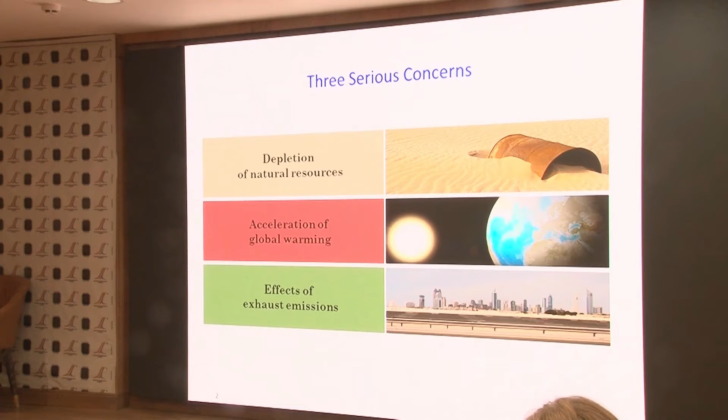So I think I'll skip some of the initial things, but one of the things that I was just having discussion with our colleagues, I would just like to draw your attention to certain things and certain facts.

One is that if you look at who is consuming most oil, the United States consumes about 26% of the oil with 300 million people. India is 2.6% of the global oil, with four times the population, which means that per capita energy consumption is 1/40th. That is one factor that we have to keep in mind.

Since 1850 Industrial Revolution, we have had almost 16, 17, 18% of the global population, but our contribution to the net GHG emissions so far has been less than 4%. That's another fact that we have to keep in mind.

So the West, Europe and America, they have used hydrocarbon sources for achieving the level of development. India has not. So we were talking about coal phasing down. I think we still are a long way from parity in per capita CO2 emissions, per capita energy consumption.

And we all know that energy consumption is related to development, human development index in some sense. We can't deny the progress, we can't deny the right of mobility to our people. The whole earth belongs to all of us. So that's one political point that I wanted to make here.

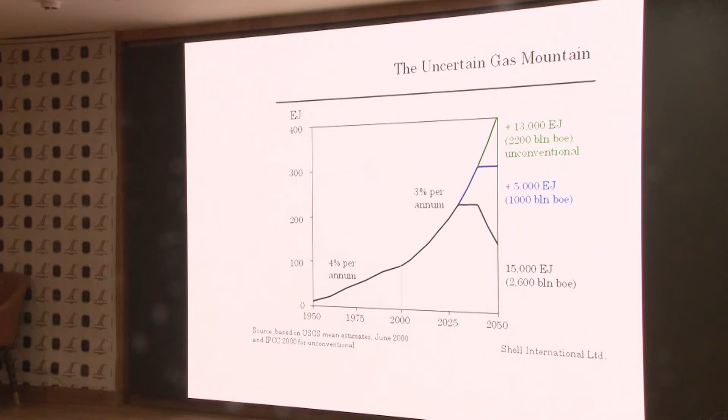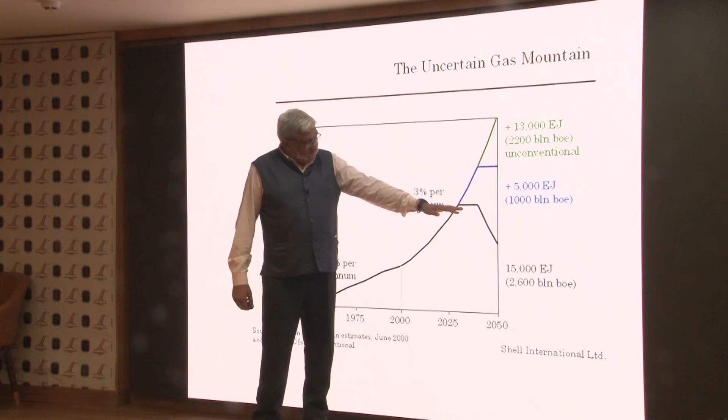If you look at the energy consumption, this is a story for 100 years. The story is that your energy consumption grew by about 4%, then it grew by about 3%, and now we are somewhere here, where our petroleum resources are going to be plateauing. And then after some plateauing of 5-10 years, they will start coming down. But our demand will keep rising.

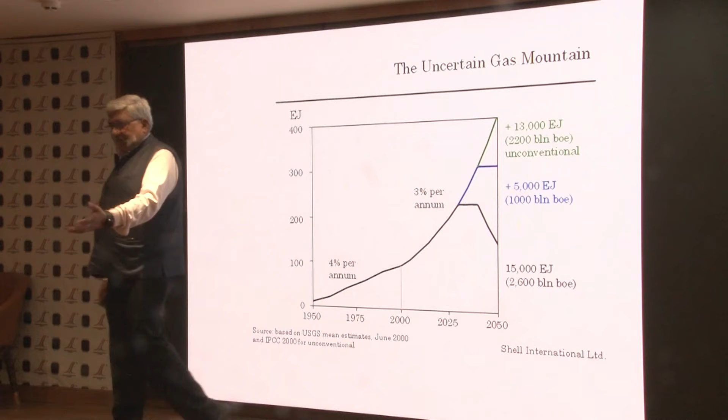So how do we meet that demand? The demand will be first met by gas. So all countries have started adopting to natural gas, hydrogen, and so on. But natural gas also has finite sources, so it will also plateau out. And then we will have to go for ammonia, hydrogen, e-fuels.

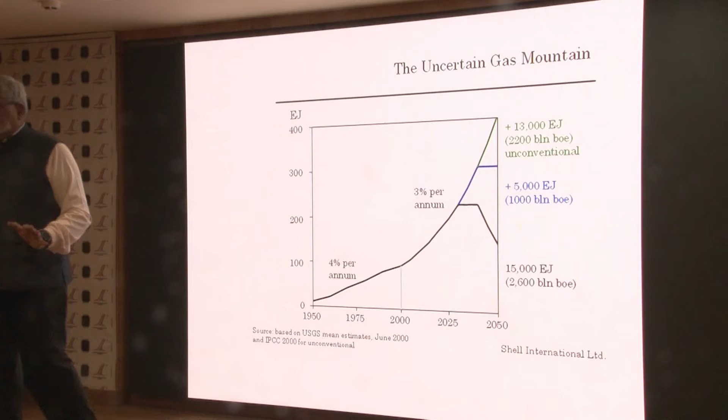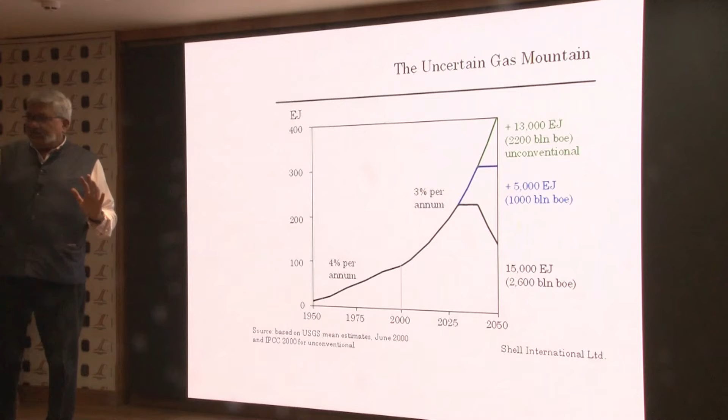So practically, this is about 2035, 2040, that leaves us with 15 years as scientists to develop solutions which are economically feasible. And we should be able to provide fuels at an economic price to compete with fossil fuels. Until then, fossil fuels, you like it or not, they are going to be there. You can't do away with them.

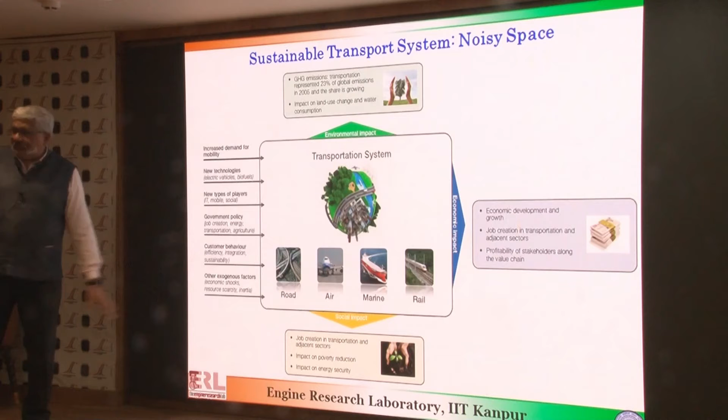The sustainable transport is a very noisy space. There are a lot of players. For example, it directly affects the economy, it directly affects employment, it has social impact, it has environmental impact, it has economic impact. I don't want to go into details, but this is very important that we go for sustainable transport. That's an objective towards which every country in the world should work.

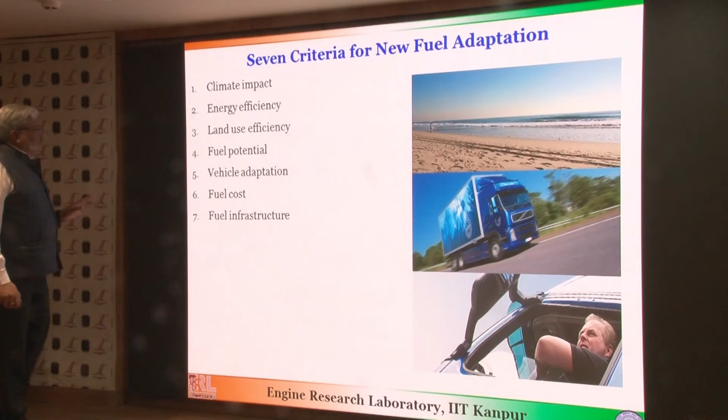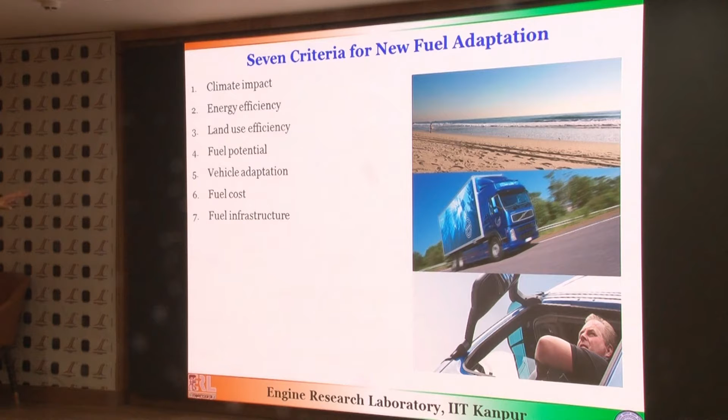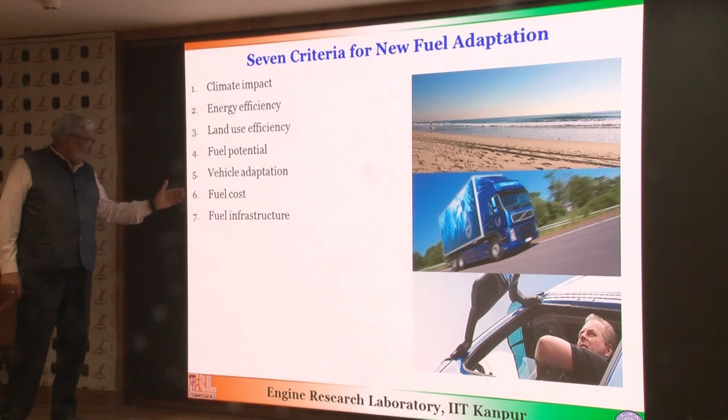This is one slide that I have taken from Volvo, and they provide a lot of transport solutions, and they propose that whenever we go for a new fuel, we have to look at these 7 factors: the impact on the climate, energy efficiency of the new fuel, land use efficiency, fuel's potential - how much you can produce, vehicle adaptation - how much hardware and software changes required, cost of the fuel and fuel infrastructure. So any new fuel you propose, you have to evaluate them.

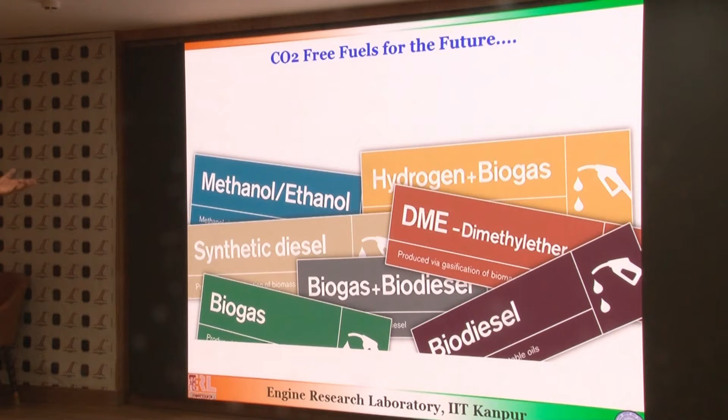And then, if you look at the sustainable fuel space, it's an extremely busy space with a lot of options coming: methanol, ethanol, hydrogen, synthetic diesel, biogas, biodiesel, and so on. And all of us agree on this, that at least in future, the fuels would still predominantly continue to be liquid fuels. They will still be made in refineries. E-fuels also have to come in some way into the refineries, use the refinery infrastructure.

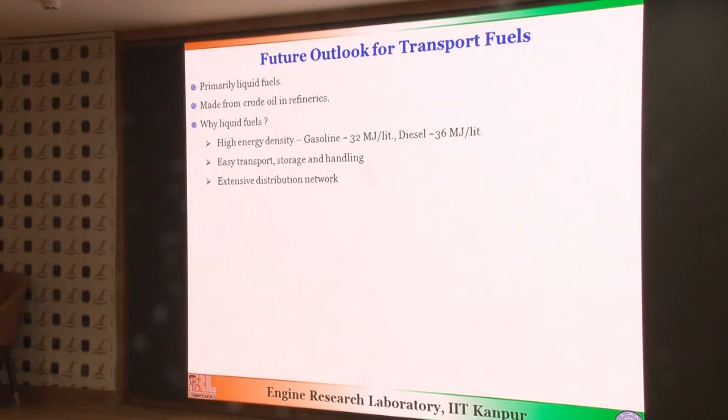Why will they be liquid fuels? Because there's nothing which packs more energy density compared to liquid fuels. They are very easy to store and handle, and there is extensive distribution network. We can't have a separate distribution network for any new fuel we propose.

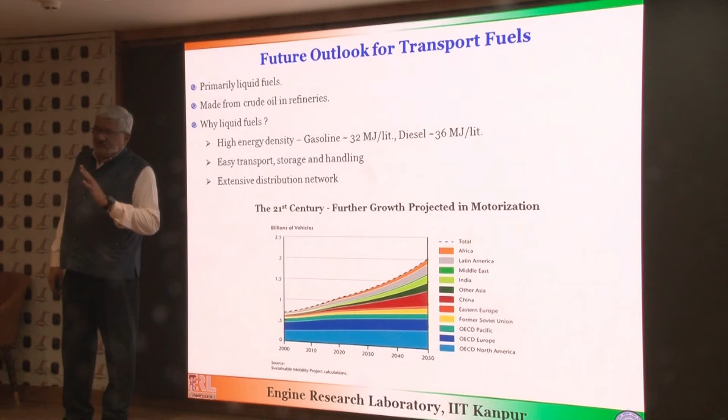India has 27 to my last count, Sakti will correct me, 27 per 1,000 people right now. So we have very little motorization, and we are just beginning to motorize and give personalized transport. So look where the action is. The action is in this triangle.

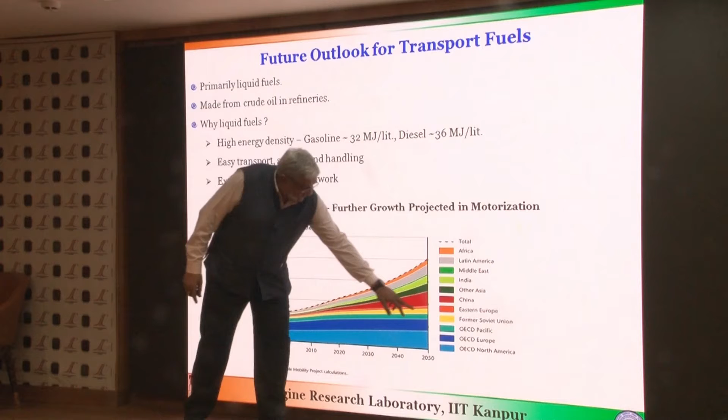And this triangle actually is China, Asia and India. So this is where the global growth is going to be in the next 20-30 years. And actually that is why Asia, or India and China, are big saviors. They are, in these times of economic depression, the engines of growth for the global economy. And this is where most of the action will happen, and we have to do it in a responsible way.

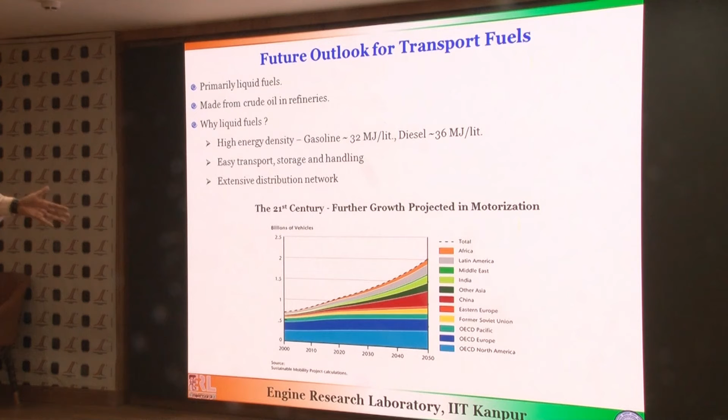So if you evaluate, excuse me.

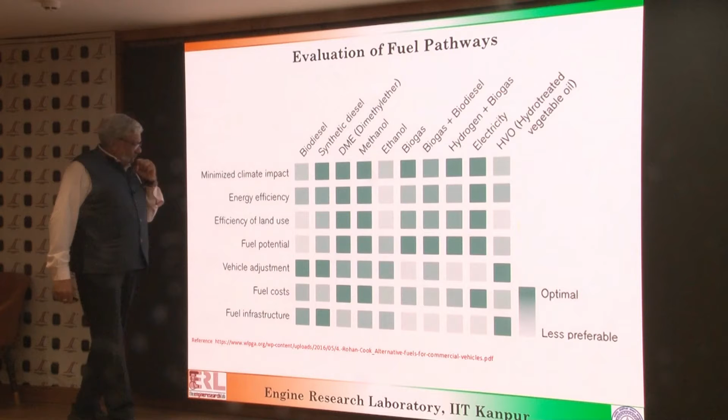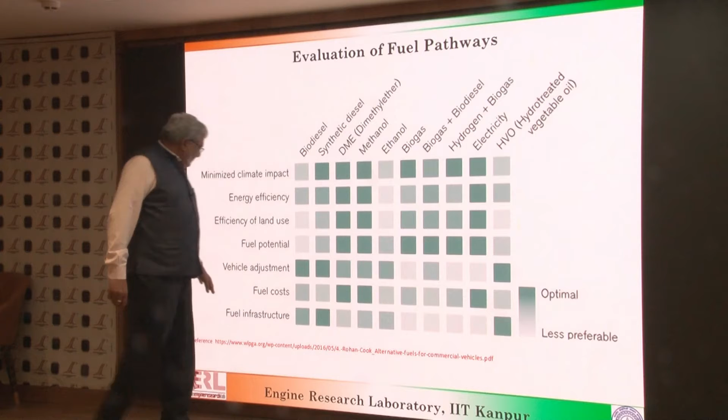So if you evaluate these fuels on the 7 factors which I just discussed, the darker one is optimal, the white one is less optimal. You can see here that in this entire sustainable fuel space, what stands out is DME, you can see these dark green patches here. Then methanol also stands out. EVs also stand out, but 2 patches are completely white, which is basically the fuel infrastructure and vehicle adjustment. It is a negative there. So from this table, you can actually figure out the future of each fuel, how it is going to be.

So in India right now, we are actually focusing on 4 important things. One is the ethanol economy. Our economy already has 12% penetration of ethanol, and we aim to bring it to 20% by 2025.

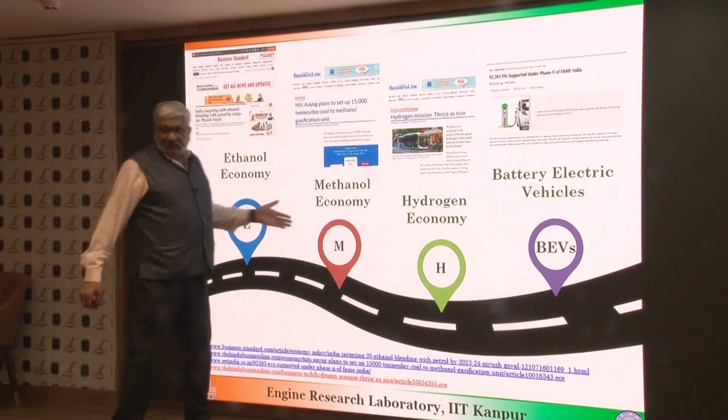We are pushing for methanol economy because we have a lot of coal reserves, and mostly 80% of our coal is high ash coal, which we can't burn in power plants or in the steel industry. So we are pushing for methanol economy by gasification, producing coal to syngas and syngas to methanol. And in this whole process, you don't put any CO2 into the atmosphere. So this is one good way.

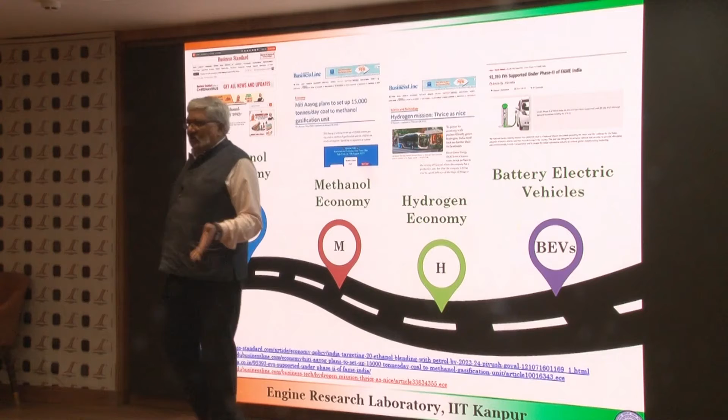And of course, government has already committed to spend about $3 billion in the hydrogen economy. We plan to have a $1 per kg hydrogen production target in 10 years. And then we are also pushing battery electric vehicles in a big way. So these are the 4-pronged approach which Government of India has taken to tackle and actually comply with our net zero, moving in that direction.

You know, this is just the beginning. So I'll talk about methanol. Methanol has 3 P factors that are very important.

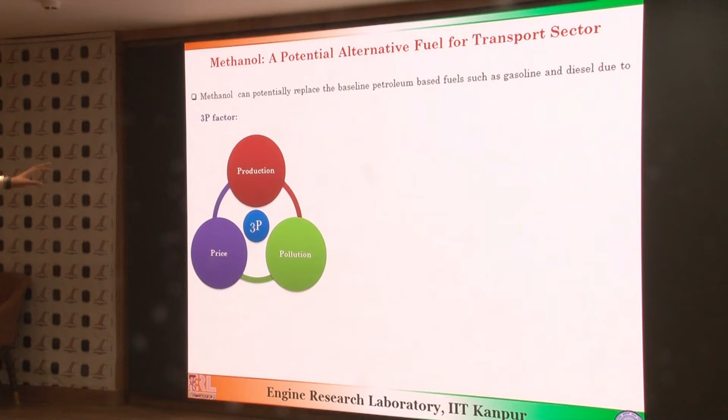One is production. Production cost of methanol in India is very, very low. When I say per unit energy, production cost per megajoule is roughly about 25% to 30% compared to fossil fuels. So it has a lot of economic advantage. The refinery guys don't like it, but that's price, production and pollution. Pollution is also very low in methanol. So these are all plus points.

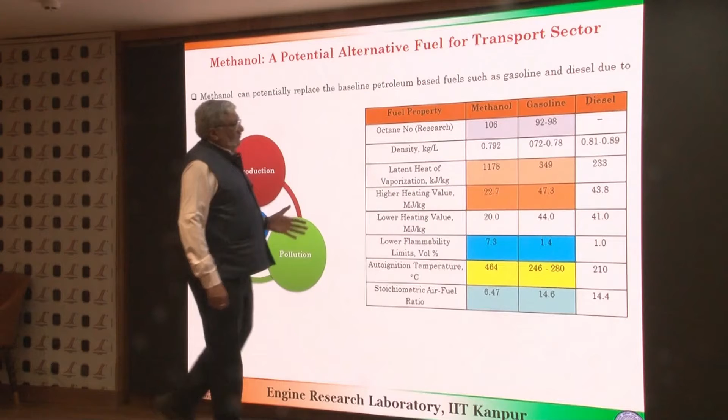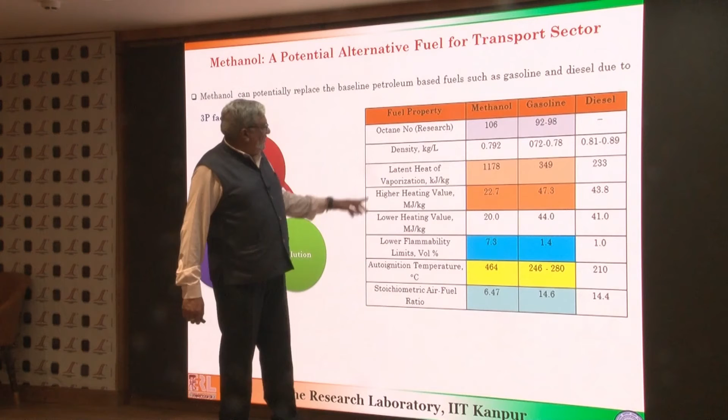Now, when we want to adopt it in the engine, we have to look at the properties very carefully. One thing that stands out is methanol has a very low calorific value, approximately half, and then a higher latent heat of vaporization. So accordingly, you have to tune your induction strategies and so on.

And then also, I'd just like to share a Chinese plan. Chinese are big on methanol. What they are trying to do is, they call it liquid sunshine, and they say methanol and DME are both e-fuels. Actually, methanol and DME are two sides of the same coin. You take 2 methanol, dehydrate them, remove water, and you are left with DME.

Methanol is a good fuel for SI engines, DME is a good fuel for CI engines. Now, what the Chinese are doing is purely economic. The government is not supporting it there. Here in India, government is supporting this. In China, there's no government support. It's purely economic reason, and they have more than 2 million vehicles running on methanol.

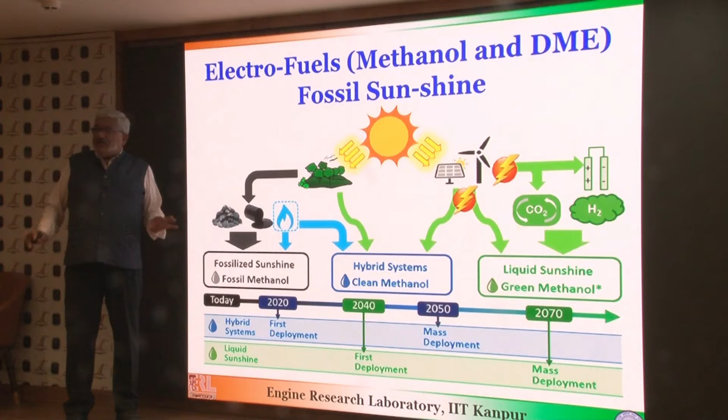So what they do is they also have a lot of high ash coal. They convert that and run all the taxis and vehicles which run long distance every day, purely because it costs less.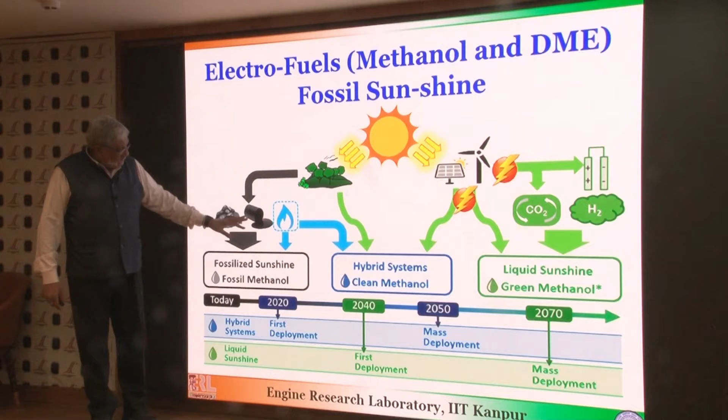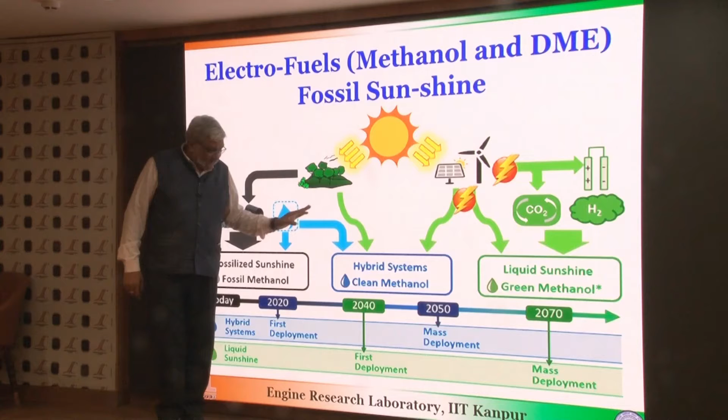And so what they plan to do is implement this at scale. They have already deployed this technology in a large scale in their economy. They want to make it clean. In order to make it clean, they will shift from coal to gas, and then eventually they will shift to biomass. Once you are on biomass, obviously the fossil CO2 will not be put into the atmosphere and it becomes cleaner. So by 2040 they want the first deployment, and mass deployment of this biomass to methanol conversion by 2050.

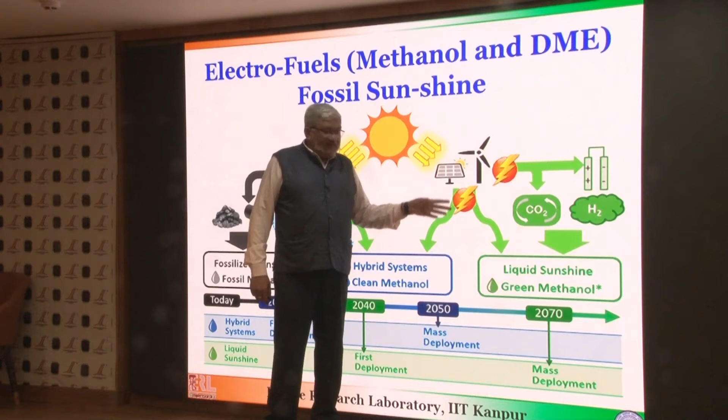And then by 2050, what they also want to do is create electricity from CO2-free sources, solar and wind, use that electricity to split water, generate hydrogen, capture the hydrogen, capture the carbon dioxide from the atmosphere, react it with hydrogen, and produce methanol. So this methanol, the first technology demonstration commercial plant, they have targeted 2040, and then large scale will be 2070. That's their plan.

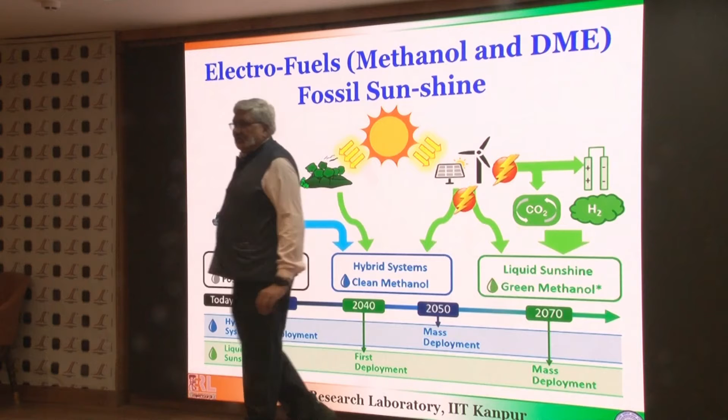And I think it makes a lot of sense, and it makes a lot of sense for us in India to follow a similar path. Not everything Chinese is bad. They are following a good strategy. At least we can tune it to our needs.

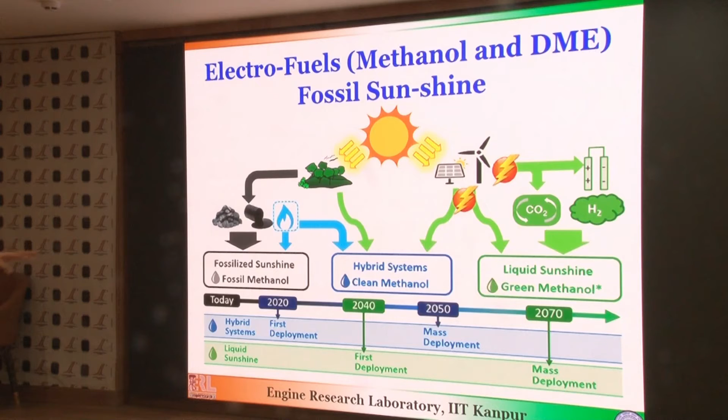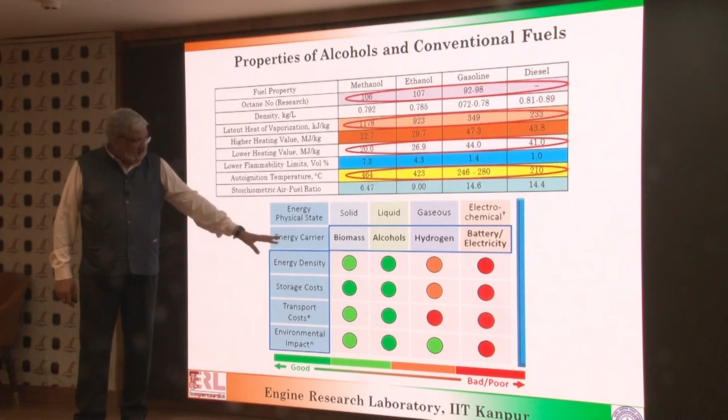Alcohols, if you look at the alcohols here, we have compared the properties of methanol with ethanol, gasoline and diesel. Again, here you see methanol has very high latent heat of vaporization, half this. And here the comparison is done for energy density, storage cost, transport cost, and in all these factors, methanol and other alcohols score much better than battery electric vehicles.

Now, methanol can be used as DME and as methanol itself. Methanol has a high octane number, 100 to 105. DME has a very high cetane number, up to 70 to 75. So you can use it in a variety of ways.

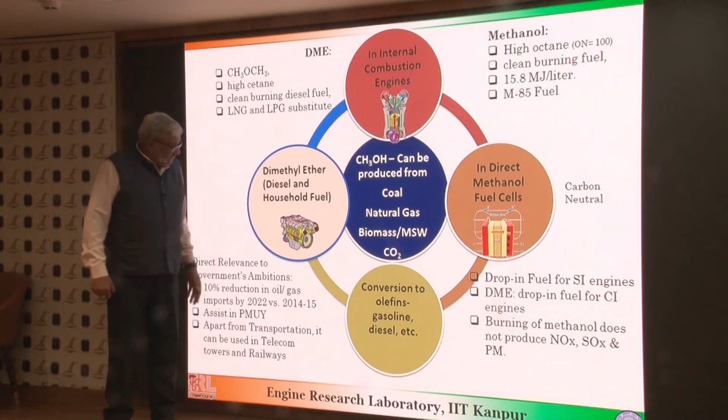For example, you can use it straight in the engine. You can use them in a fuel cell. You can convert them into hydrocarbons. Yesterday, Dr. Alok Sharma was showing how you can do it. And you can actually run DME in diesel engines.

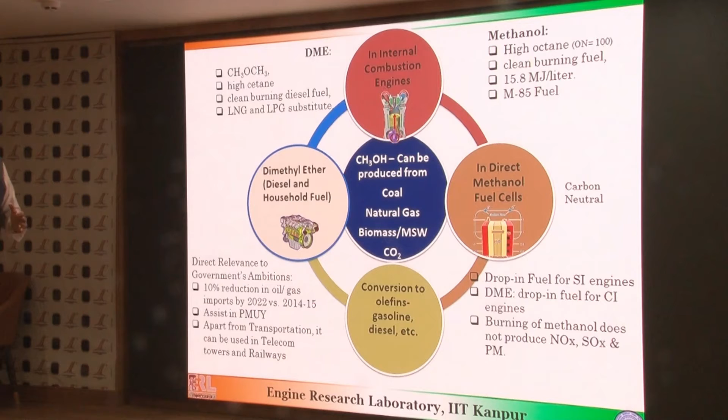So you can practically run the entire array of the transport sector, whether it's small vehicles, cars, ships, buses or trucks, on methanol and DME.

And in addition, we import a lot of LPG for our cooking. Now this DME can also be used for cooking purposes. So it can not only take care of transport, but it can also take care of cooking.

But the limitations of methanol are its lower calorific value, so the range of the vehicle will be less, half. And then they can produce formaldehyde emissions. And they are completely miscible with water, so if there is any accidental spill, they can cause some flora and fauna damage.

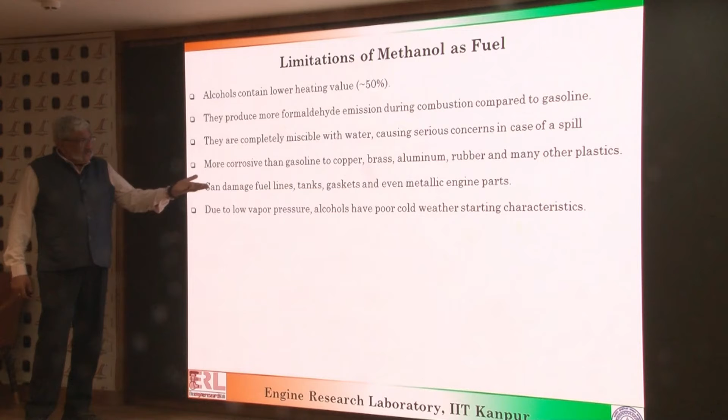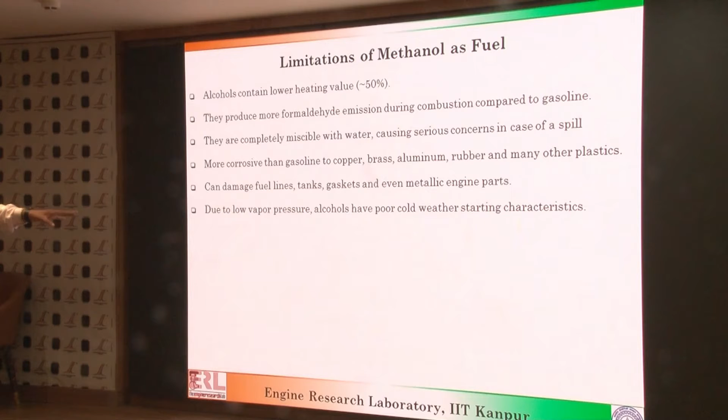But the good news is that in water it degenerates very fast, so it will get diluted out. It's more corrosive, so this is an engineering challenge for which solutions can be found or have already been found. It can damage fuel lines, again a material problem, and there are solutions for this, and there's some low vapor pressure problem. So these problems we face with methanol are mostly engineering problems, and there are engineering solutions for that, and many demonstrations where all these problems have already been tackled.

Now, in my opinion, India has gone for a methanol economy. This is just a view graph I made to explain methanol economy in a very simple way. So any stray carbon that you have in our economy, we have a lot of garbage. Yesterday we saw a mountain at the entry of Delhi, garbage of the society, agricultural waste, kitchen waste, high ash coal.

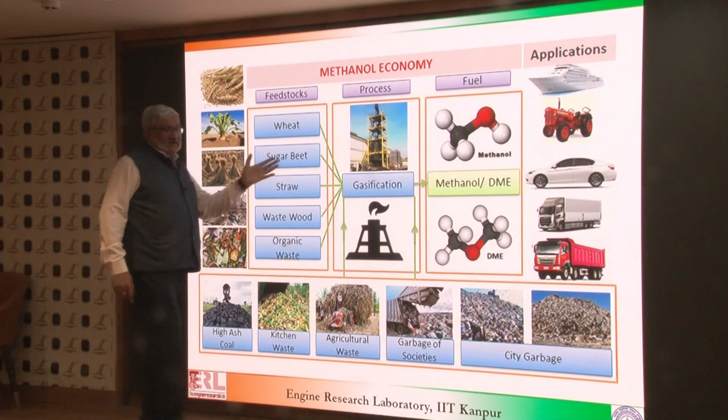We burn a lot of crops, which is causing this pollution. All of this is nothing but carbon. So any carbon in the society you have, it's gold. You basically collect all of that and gasify it to produce carbon monoxide plus hydrogen.

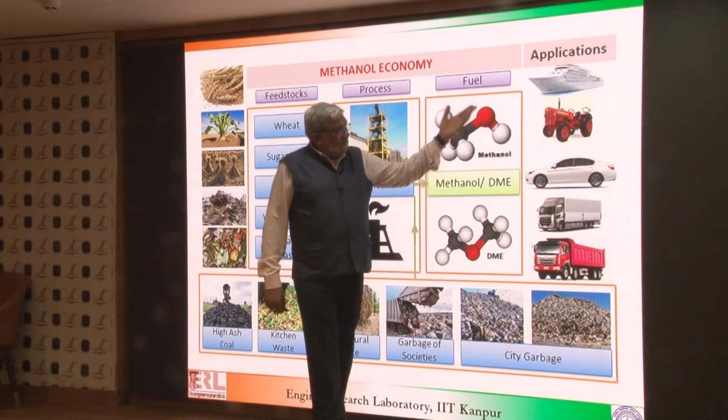Correct the stoichiometry for every carbon monoxide two hydrogen, and in one-step process you can make methanol. From methanol, in a one-step process you can make DME. Then you can run your entire economy, whether it is transport, power generation, gensets, any application. So this is in brief what is the concept of methanol economy.

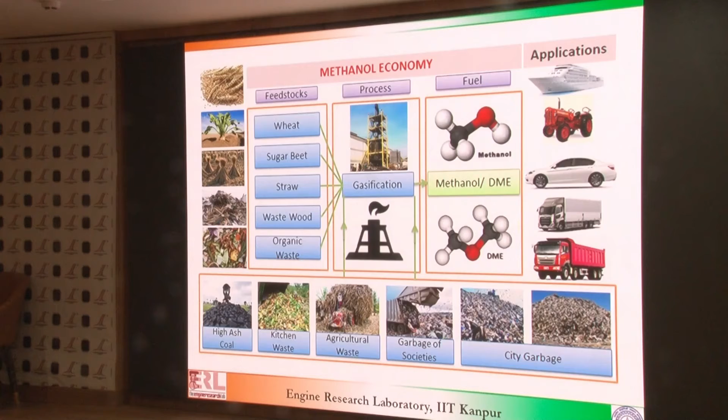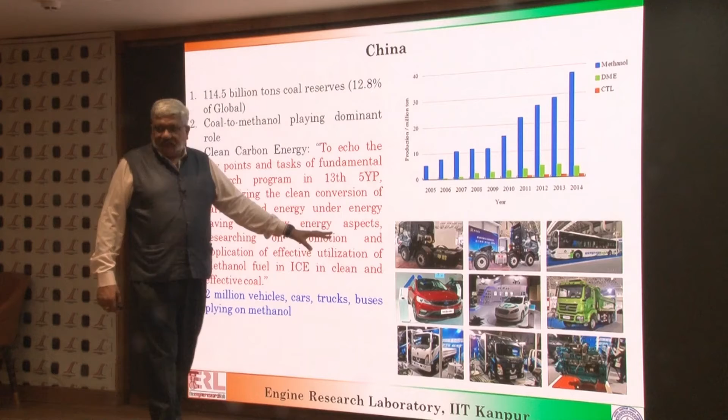Now what I am talking about is not just our fantasy, people are using it. For example, in China, as I mentioned, there are a variety of vehicles, all the way from cars to trucks. This is old data, by the way, 10 years old. 10 years ago they were producing about 40 million tons every year of methanol.

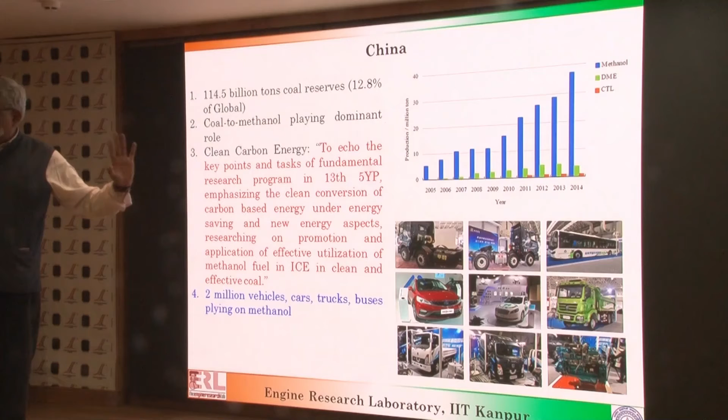Just to put things in perspective, India consumes about 200 million tons of petroleum products, so it's a very serious quantity. There is a lot of scope. Methanol, DME, and coal to liquid are fuels which can be produced from coal and biomass at a very, very large scale at a very economic point.

In China, there are different states and different blends, M15, M30, M25. So these are all legal blends, and every state has promulgated and legalized them. So in China, this is legal to sell.

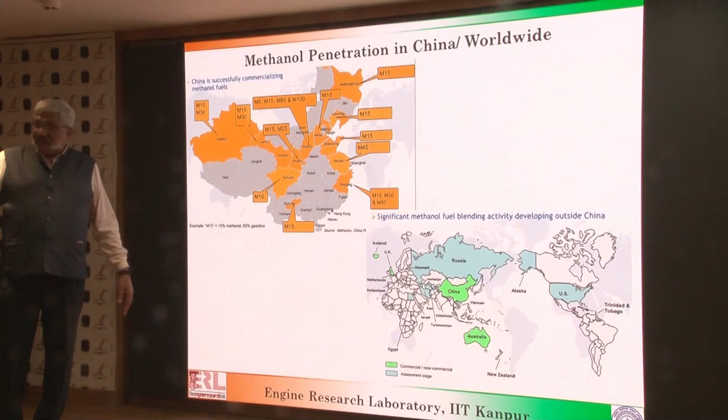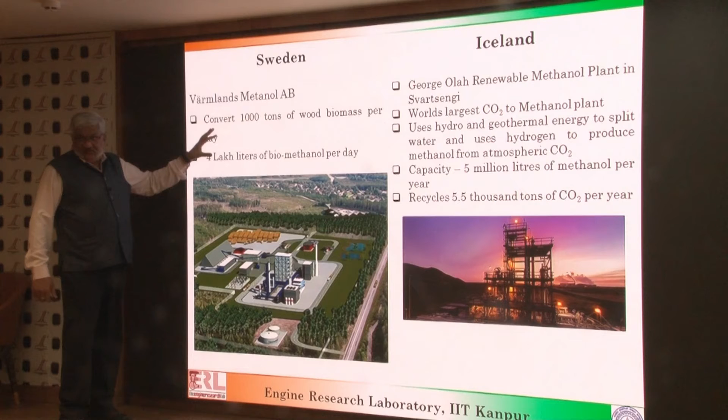In Sweden, there is a plant called Varmlands Metanol AB where basically they use wood biomass and convert it to 4 lakh liters, which is 400,000 liters per day of biomethanol. In Iceland also, they take geothermal energy and capture CO2 from the atmosphere, removing about 5.5 thousand tons of CO2, and they produce a lot of methanol.

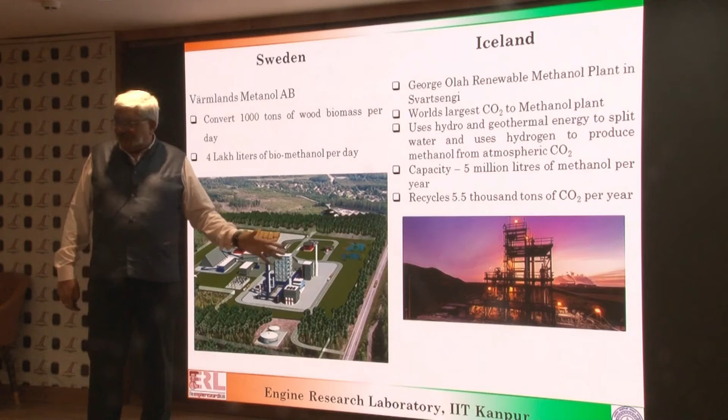So these are all demonstrated technologies at a commercial scale. This is all possible. If you have low grade heat available, you can capture CO2 from the atmosphere and produce methanol.

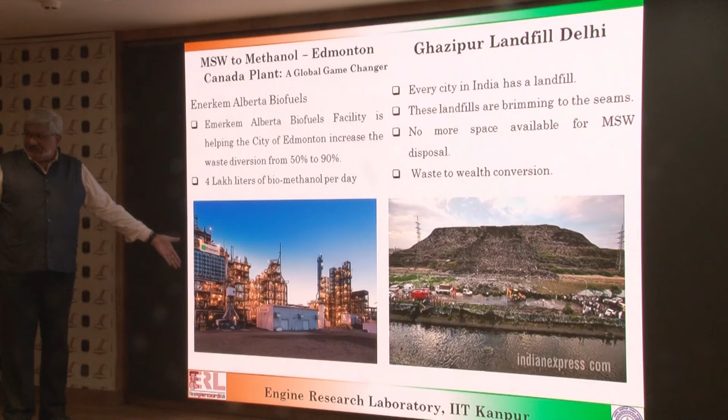In Edmonton in Canada, there is a plant which converts municipal solid waste into methanol, and they also produce about 400,000 liters per day. And yesterday we saw this.

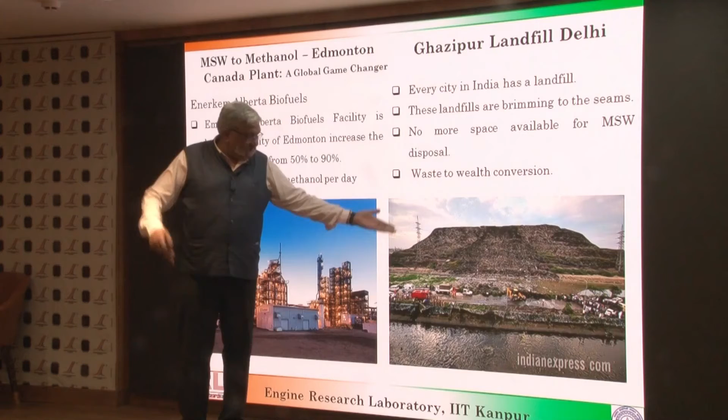Can't we take care of it? It's a challenge for TERI and other guys, IOC guys. Do something about it, we should have something like this and make our city cleaner.

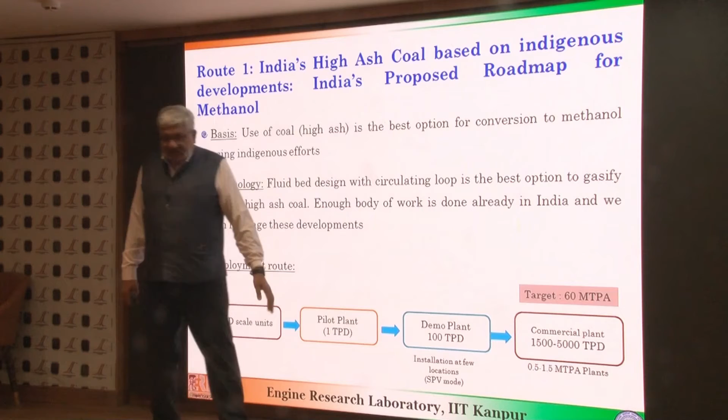Okay, so India is also working on this, and I think there are already R&D scale pilot plants demonstrated by BHEL and Thermax, a 100 ton per day plant is also demonstrated. Now we are moving in the direction of a 1500 ton per day plant from coal to methanol.

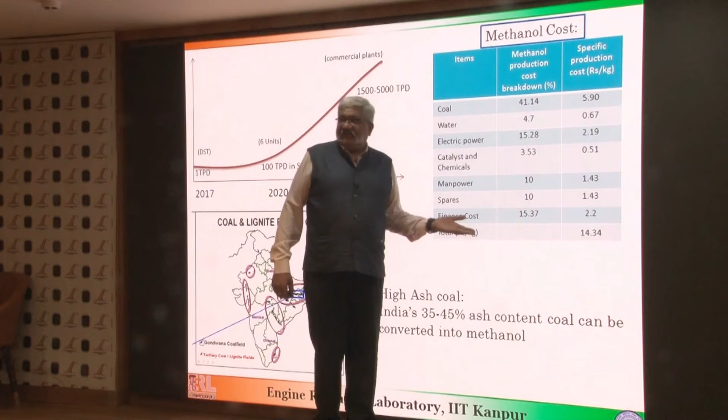So this is the production. The cost of methanol production is roughly about 14 rupees 35 paisa per kilogram, and if you take density into account, this is 12 rupees per liter.

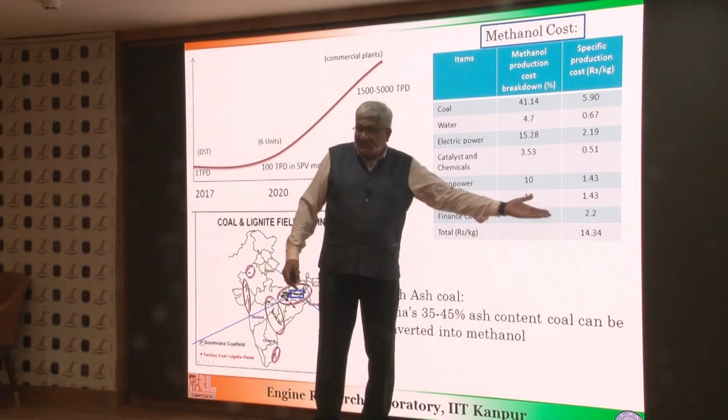What is the price of petrol in Delhi? 95, 100 rupees, and this is 15 rupees per liter. If you take twice the amount, for the same energy you are paying 25-30 rupees. With 28% tax, still 40 rupees. So it makes a lot of sense.

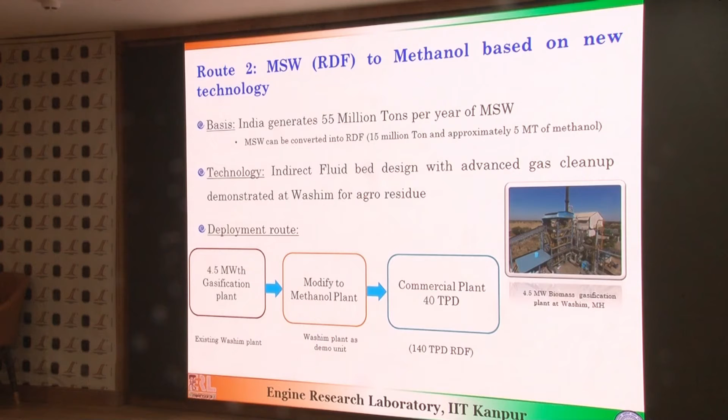And we have a lot of coal available. This is the plant done by Thermax in Washim in Maharashtra, and these are the chemical processes. If somebody wants, I can share this. There are a lot of process plants showing how you do it.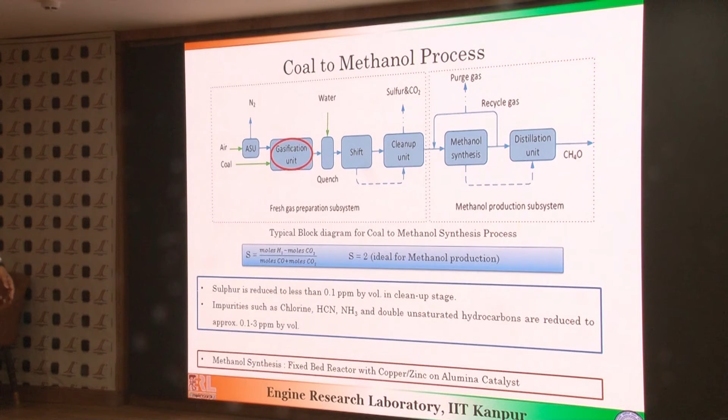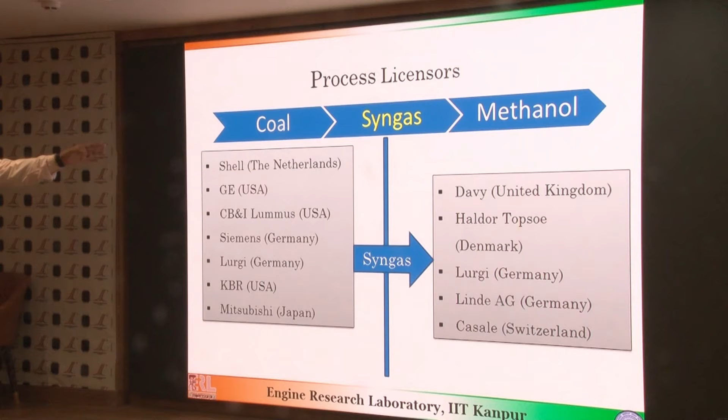This is a little bit of a chemical thing, I'm not an expert in this, but I can explain it if somebody wants. There are process licensors, it's not a rocket science. There are already commercial processes available, standard commercial products from coal to syngas, and standard process licenses you can get from syngas to methanol production.

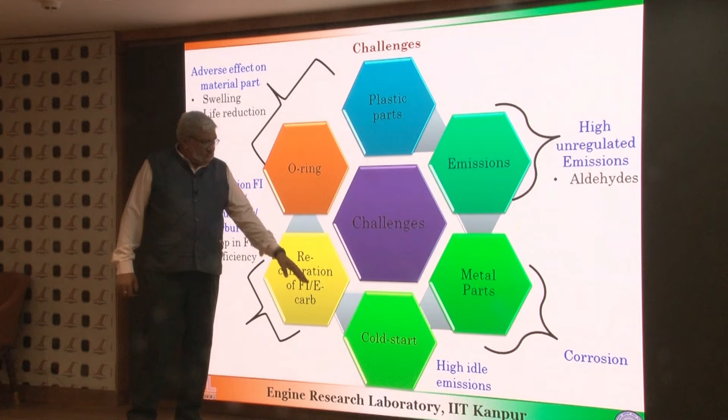But coming to the engine part, there are a lot of challenges. For example, O-rings, plastic parts, emissions, calibration, cold starting issues, metal parts. So all these are engineering problems, and there are engineering solutions for it.

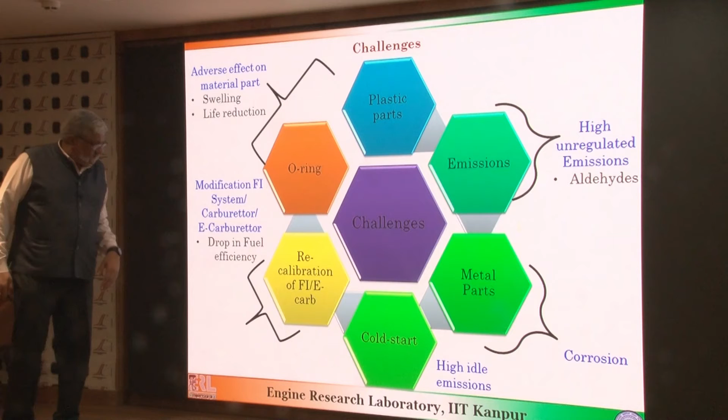In my lab, Hardik has done a lot of work, and we will—I wish you were in Kanpur, we would have shown you that we have resolved most of these problems. So I'll skip some of these. My time has run out, but to have a methanol based system, we have to look at FIE, which is one of the bottlenecks.

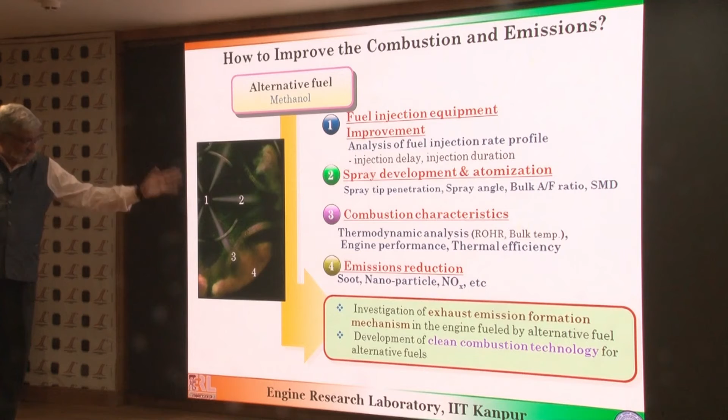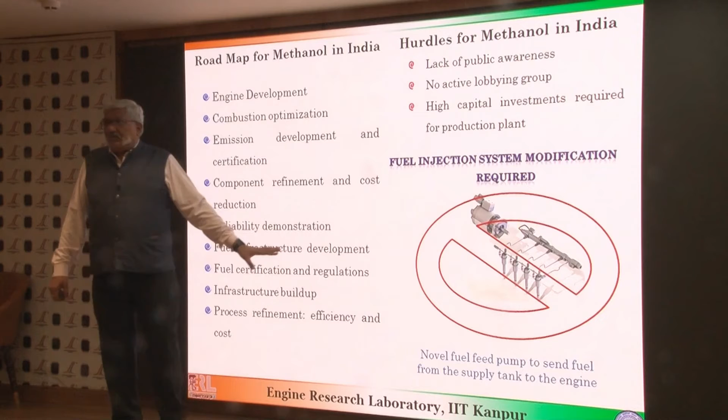Bosch does not support methanol that much, so we have to look at that part. Then spray development and atomization, something which CAMI does, so this is where a lot of work is required. Combustion, where all of you guys work, combustion characterization, optimization, and then of course there are emissions, whatever unregulated emissions are there. So these are 4 different aspects, if we break this into parts, which we need to look at. And I think the fuel injection equipment remains one of the big challenges in introducing methanol economy in our country.

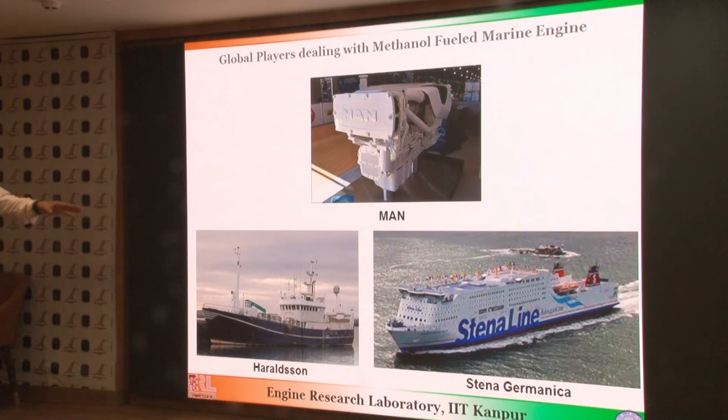In Europe, there is a lot of interest in marine, and we have the Stena Germanica. There are norms for clean fuels close to the coast, and they have to switch from the conventional bunker fuel to methanol. This Stena company has at least 15 ships running on methanol, 100% methanol.

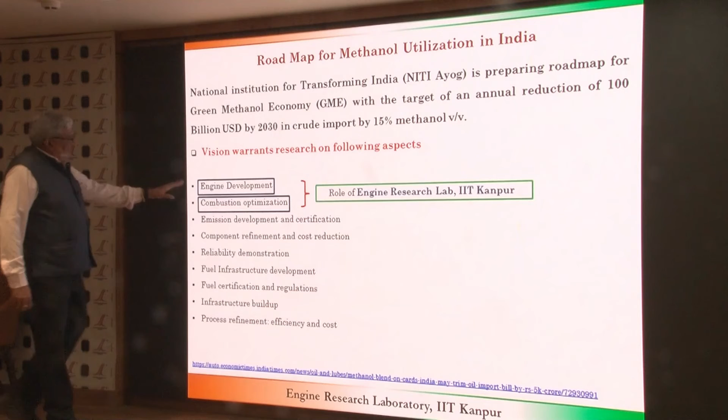So I published a paper in Nature India, 'Methanol pollution woes: is methanol a solution?' I'll be happy to share the link, please feel free to download and look at it. So IIT Kanpur is basically focusing on engine development and combustion optimization. There are other things, but Niti Aayog has only assigned us 2 responsibilities, and we are looking at it.

For this, we have developed a motorcycle, 500cc motorcycle, which is a PFI motorcycle. They asked us to provide a solution for small motorcycle, 100 and 125cc, and they said you have to do it in 100 rupees, meaning the conversion cost should be $2 for a normal motorcycle too. So we did it. And then we did a simulation for a locomotive engine where we did 90% replacement.

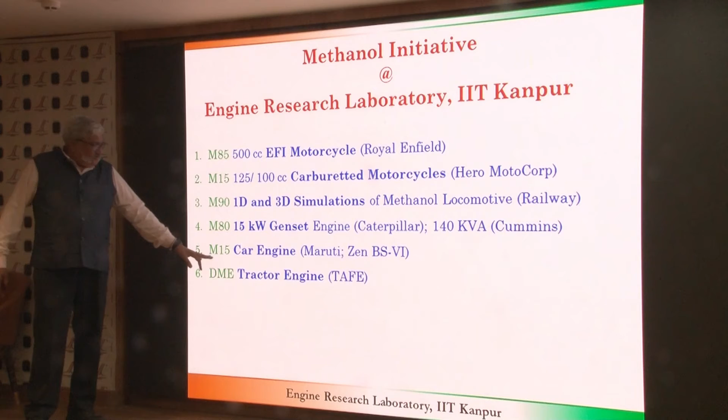We could not do experiments because the funding was not given. Then we have done a 15 kilowatt genset which runs on M80. Then we have done a car engine with Maruti which runs on M15, and then we have developed a 100% DME tractor, all in my lab. These are the pictures of the products that we have developed.

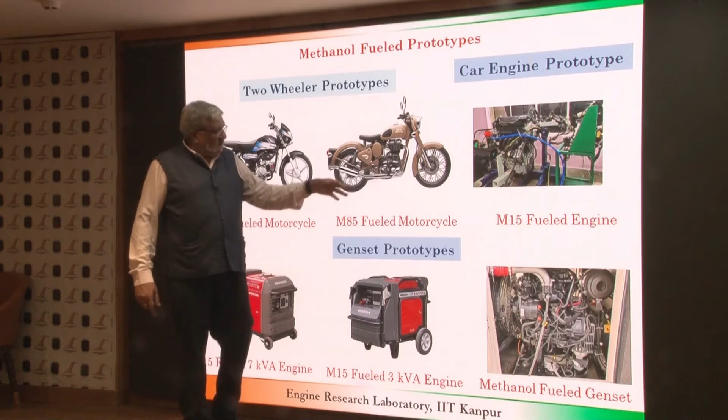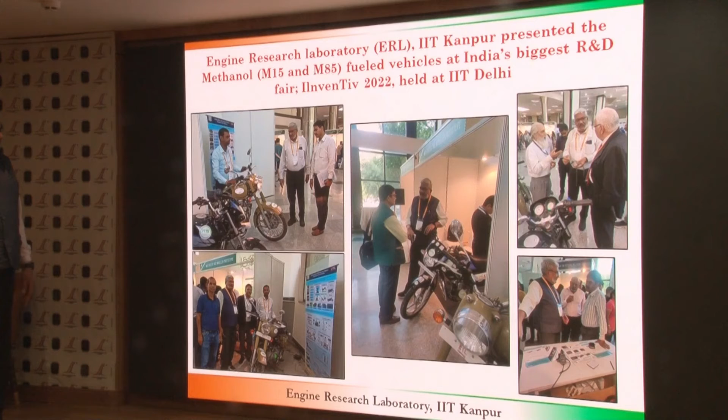So this one cost about, the conversion cost is about $2. This one is about $50. So you can have this PFI, and then the M15 fueled engine, and then we have gensets of all kinds. So these are other products that we are developing, 80% displacement, and we demonstrated them in several places.

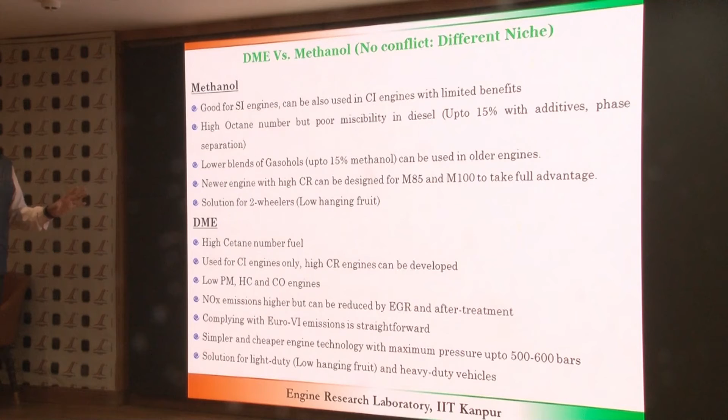We also published these books from Springer on methanol, one for CI engines, the other one for SI engines. Do we have some of these copies, Hardik? I think we should give them to some of our guests. So in methanol and DME there is no conflict, because they both cater to different niches. One caters to SI engines, the other one caters to CI engines, and therefore both can be really looked at.

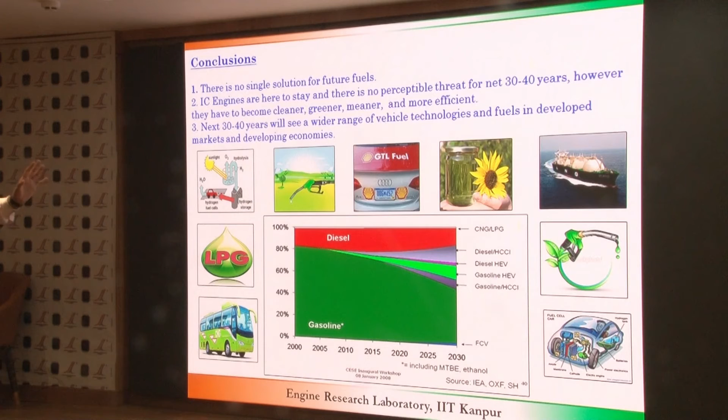In conclusion, there is no silver bullet, there is no single solution. We have to look at all possible fuels. The problem is mammoth. If somebody says hydrogen can displace everything, that's not possible. If somebody says methanol can displace everything, that's not possible. We have to look at all possible solutions, whatever displacement of fossil fuel we can do, whatever carbon neutrality we can achieve. Let's all try to do that, it's a very fertile time where technologies should be developed, all kinds of technologies should be developed. We should not say no to anything, because every technology has a space, has a role.

And this is my final slide. This is the objective of all of us: IC engines have to survive. They should not be making noise. They should not be visible. They should not be giving visible smoke. They should not be giving any smell. It should be all clean and environment-friendly.